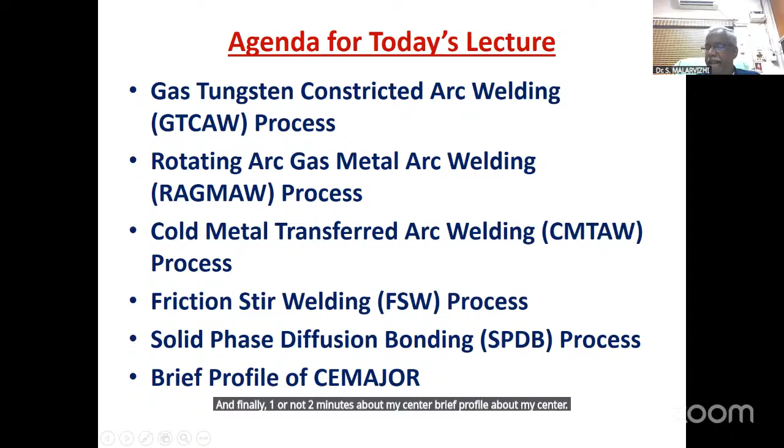The agenda for today's lecture is to cover five processes that are relatively new. I cannot say very new, but relatively new compared to other processes. One is gas tungsten constricted arc welding, GTCAW, also known as interpulse TIG welding. The other is MIG welding - rotating arc gas metal arc welding, another variant of the gas metal arc welding process. Third is CMT, cold metal transfer arc welding, which many people talk about. Then a lot of work has been done here at Annamalai University on friction stir welding, FSW. Finally, I'll give some glimpses of the solid phase diffusion bonding process, and 1 or 2 minutes about my center - a brief profile. This is my agenda for today's lecture. So the first process is gas tungsten constricted arc welding.

It's a relatively new process in TIG welding. You all know that TIG welding is a high quality, clean process, and though it is good for thin sheet welding, it is not suitable for thick sheets or thick plates. It's a non-consumable arc welding process. This is the diagram you all know - you have a tungsten electrode through which current passes, and an arc is established between the electrode and the workpiece. Then you need to supply the filler rod in the arc column to melt it. If the thickness of the sheet is less than 3 mm, that's the rule, you don't need to use the filler rod. If the thickness is greater than 3 mm, then filler rod addition is required.

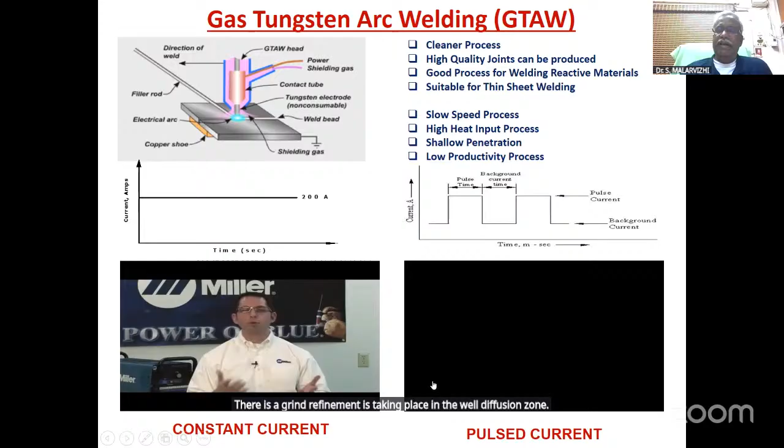In conventional TIG welding, as I told earlier, the arc is a bell-shaped arc, so it covers a larger area. It heats a larger area, and the heat supplied by the arc is distributed over that larger area. When it is distributed over a larger area, you heat a larger area, and the net result is shallow penetration.

But if you are able to constrict the arc by some means, then the arc can be narrowed down and becomes a stiff arc. Once it becomes a narrow arc, the area under the arc is greatly reduced, and you get deeper penetration in this process. Especially in fusion welding, the process which produces a very narrow weld zone or fusion zone is preferable.

Also, if you reduce the fusion zone size or weld zone size, the heat-affected zone size will also be reduced. So in this process, gas tungsten constricted arc welding, also known as interpulse TIG welding, they use superposition of a high frequency waveform on the main current. So you have main current, that's the maximum peak current, and the base current, similar to pulse current welding.

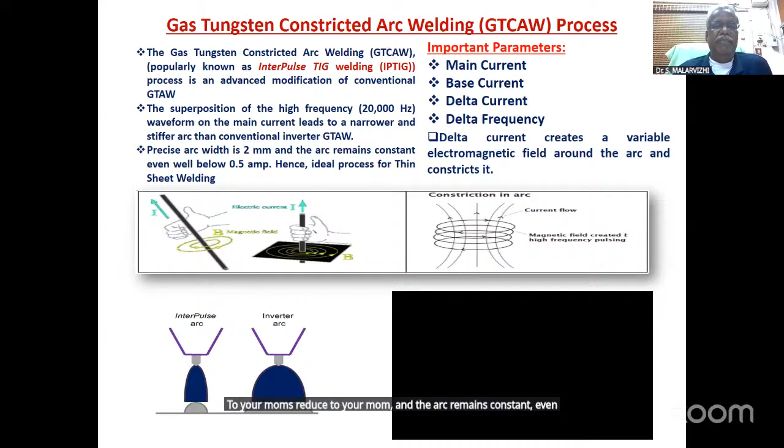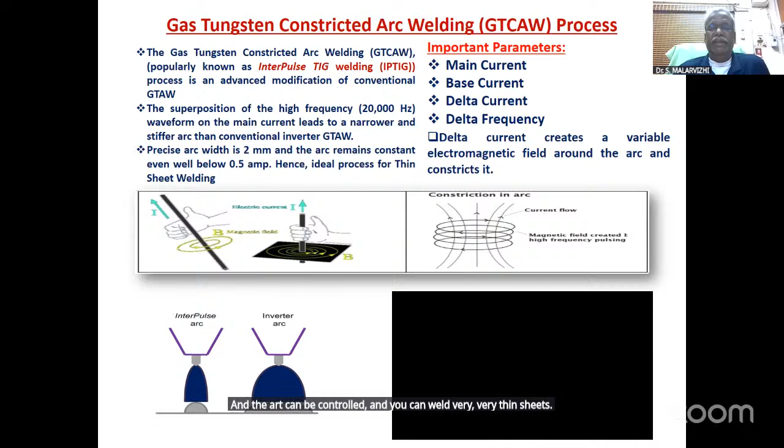By doing that, the arc width is reduced to 2 mm, and the arc remains constant even well below 0.5 ampere. That is the advantage of this process. Even at low current, the arc can be controlled, and you can weld very, very thin sheets with minimum heat input. That is the advantage of this process.

There are different modes available in this process. If you want to weld, you go for the high penetration mode. In this mode, the interpulse current, which is the superimposed delta current, is lower than the main current. If you use this condition, you will get deeper penetration.

But if the delta current, the interpulse current, is greater than the main current, then you can go for surface modification like cladding, hard facing, and also structure buildup. They use this mode for that purpose. Both modes are available in the process.

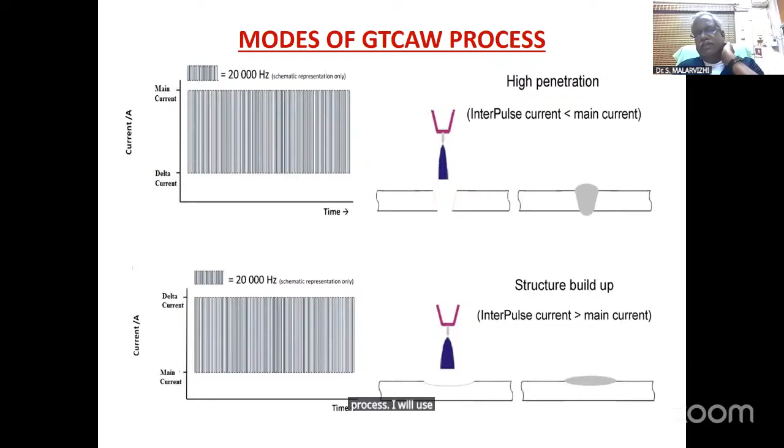We use this process for welding Inconel alloy, because Inconel is a nickel-based, high temperature alloy. In most aero engine components and gas turbines, nearly 47% of the components are made up of nickel-based alloys, and 25% of components are made of titanium alloy.

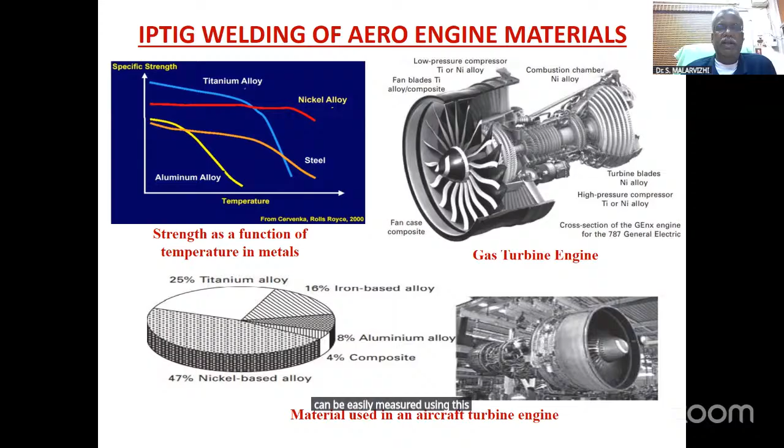So these two alloys can be easily welded using gas tungsten constricted arc welding. We have done a lot of work on tungsten, titanium alloy, and nickel-based alloy. Here I present just one case study which we did on the Inconel 718 alloy. This work was done for ISRO, VSSC Trivandrum, in collaboration with them. So this is about where the Inconel 718 alloy is used.

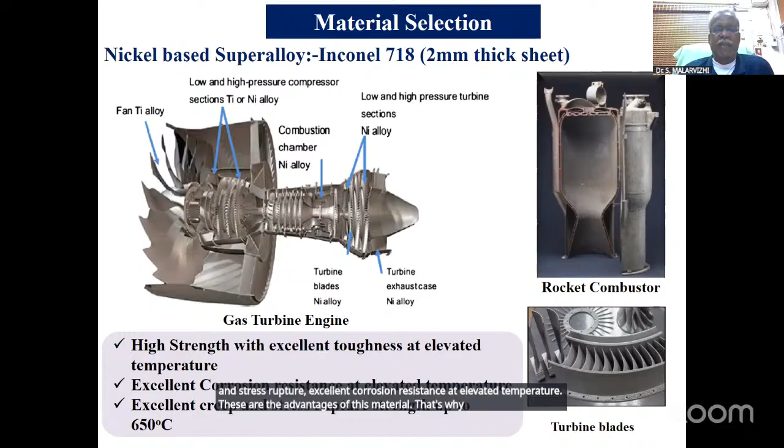High strength with excellent toughness at elevated temperature, excellent creep and stress rupture, excellent corrosion resistance at elevated temperature - these are the advantages of this material. That's why they are using it in aero engine gas turbine components. Here, generally, they are using gas tungsten arc welding, the conventional arc welding process to join these Inconel alloys.

When you use these alloys, because of the high heat input and lower arc penetration, which I explained earlier, that leads to porosity formation, distortion, and hot cracking related problems. It also leads to niobium segregation - niobium being one of the major alloying elements - and it forms in the fusion zone, drastically reducing the joint efficiency and leading to premature failure.

So this is the coarse dendritic structure that forms in the welded fusion zone, and here it is a coarse and interconnected Laves phase - that's an intermetallic phase. It's a brittle phase which forms in the fusion zone during welding using conventional TIG welding, GTAW, because of the high heat input and lower arc penetration.

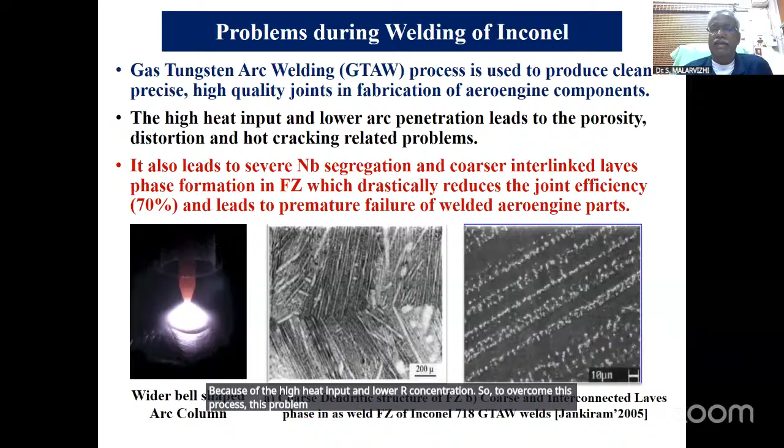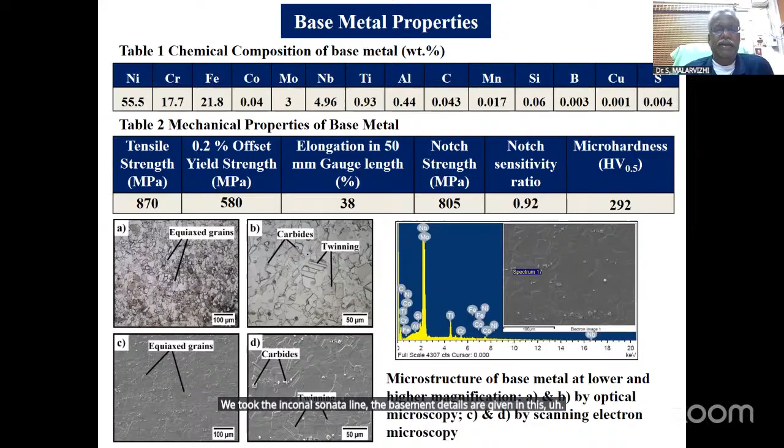So to overcome this problem, we utilized interpulse TIG welding, constricted arc welding. We took the Inconel 718 alloy, and the base metal details are given in this slide. After welding, the joints were compared with the base metal. The base metal tensile strength is 870 megapascal, and the welded joint after welding yielded 863 megapascal - that is nearly 99% joint efficiency.

But failure occurs again in the fusion zone because the fusion zone hardness is a little bit lower. If you see, the fusion zone hardness is 284 and base metal is 292; at the interface between the fusion zone and the heat affected zone, the failure has occurred. Also the notch strength ratio is less than 1, indicating that both the base metal and the welded joint are notch brittle materials - when you introduce a notch, it will behave like a brittle material.

So then we went for microstructure analysis, and elemental analysis was done. If you see the niobium phase, which is responsible for the formation of the Laves phase in this alloy, the base metal has 7.65% niobium. But exactly on the Laves phase, if you measure the composition, it has 10.05% niobium - an increase of nearly 2.5%. In the dendritic core, the niobium content is 5.57%. So the question was how to minimize the formation of niobium in the Laves phase.

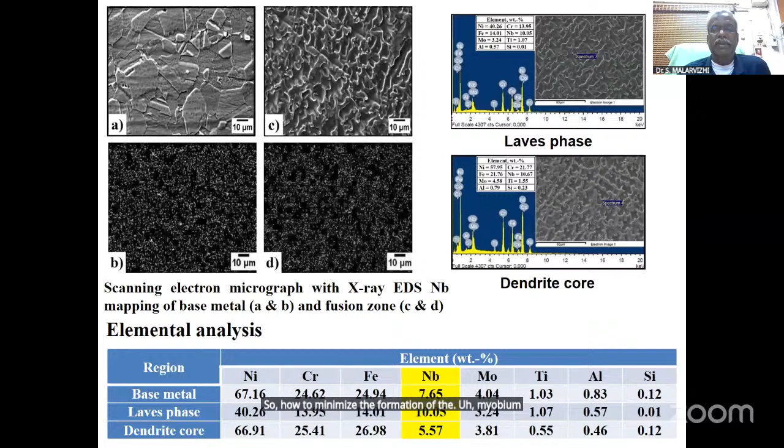So then we optimized the parameters using response surface methodology, and we found results. If you see this table of tensile properties of the joint - forget about the top one - if you use GTAW, the conventional TIG welding process, the joint efficiency obtained is only 71%. If you use gas tungsten constricted arc welding on the same material in the as-welded condition, it gives 99.2%, almost matching the base material strength.

And for EB welding, electron beam welding, the literature reports that you can achieve only 91.66%, and laser beam welding also only achieves 96%. So this process is much better than the GTAW process, and it is proven to be an alternate process to EB welding and laser beam welding.

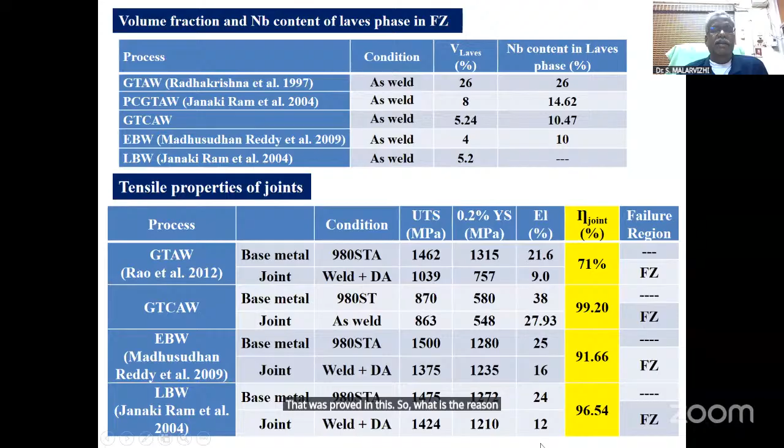So the reason for the superior tensile properties is attributed to grain refinement, because there is a pulsating action, and lower Laves phase formation, since the Laves phase formation is disrupted by the fluctuating action of the arc, with refinement observed in the fusion zone. The joint efficiency is 20 to 30% higher compared to the conventional TIG welding process. So this process is now used for joining titanium alloys as well as Inconel alloys, and is used for the repair and refurbishment of aero engine components.

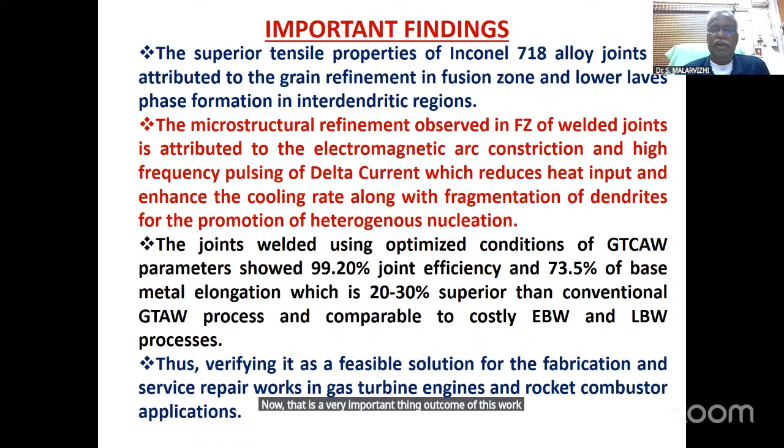That is a very important outcome of this work, and this can be applied for the repair and refurbishment of aero engine components.

I want to focus on another advanced process in GMAW, known as the rotating arc welding technique. Here the electrode rotates in a circular motion. In GMAW, the wire is fed in the forward direction, but here the filler wire is rotated. Let's see the clipping.

So here you can use no edge preparation.

The molten droplets are propelled from wire to base metal in a circular pattern, producing a centrifugal force which acts on the molten pool, minimizes the heat input, improves sidewall fusion, and produces minimum heat affected zone width. These are the advantages of this process.

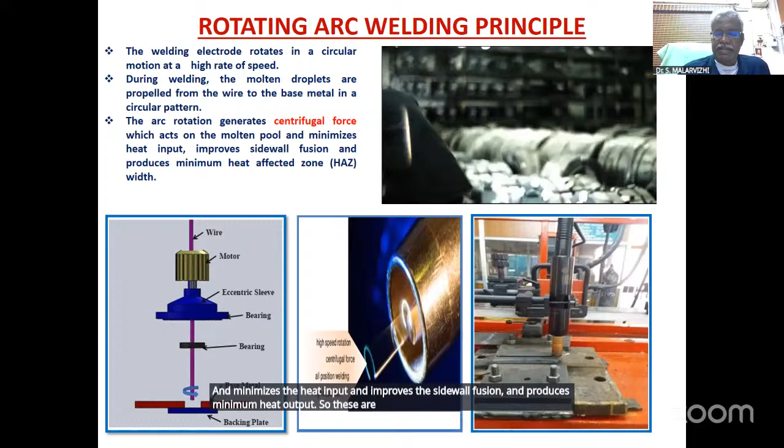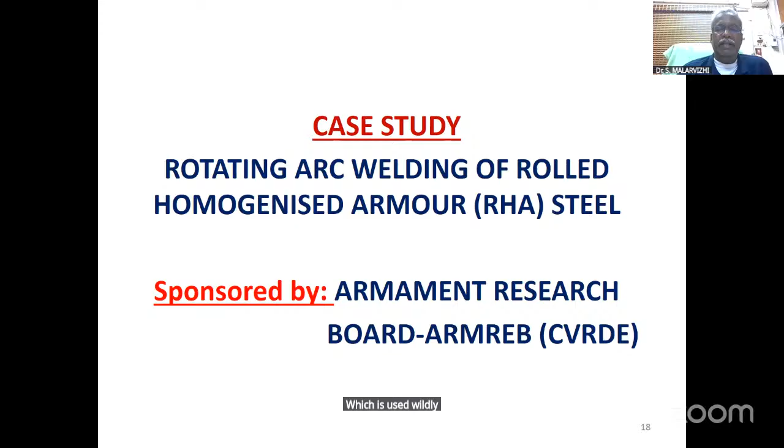We have this facility in our center, and the work was done on RHA steel, rolled homogeneous armor steel, which is used widely in the construction of battle tanks. This work is supported by CVRDE, Combat Vehicle Research and Development Establishment. For welding the armor steel, we use this process.

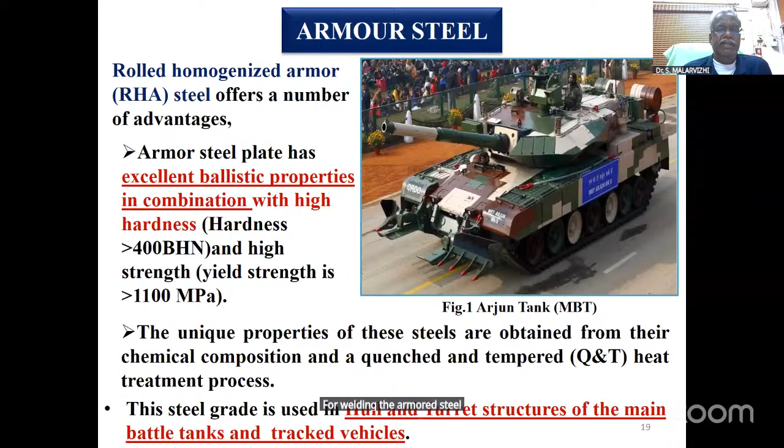With thick plates, one problem during welding is the joint design - we have to go for a single V groove or double V groove. Position welding is impossible to weld out of position in spray transfer mode. In many cases, when you go for multi-pass welding, improper sidewall fusion is one problem, and especially in RHA steel, heat affected zone softening is another problem.

Normally the heat affected zone has higher hardness, but here it gets softened due to the heat supplied by the process. Because heat affected zone softening occurs, it goes below the hardness level of the base metal. Then there is a possibility that if a projectile attacks exactly on the heat affected zone, it will pass through the base metal. These are the problems.

So here we took conventional MIG welding, GMAW process, referred to as SA - stationary arc, that's conventional GMAW. RA is rotating arc GMAW, the new process we are discussing.

For an 18 mm thickness plate, the stationary arc process used 6 passes to complete full penetration joint fabrication. But in the RA rotating arc process, we need only 3 passes, because there is no edge preparation - it's a square butt joint configuration as welded here. That's why the number of passes is reduced.

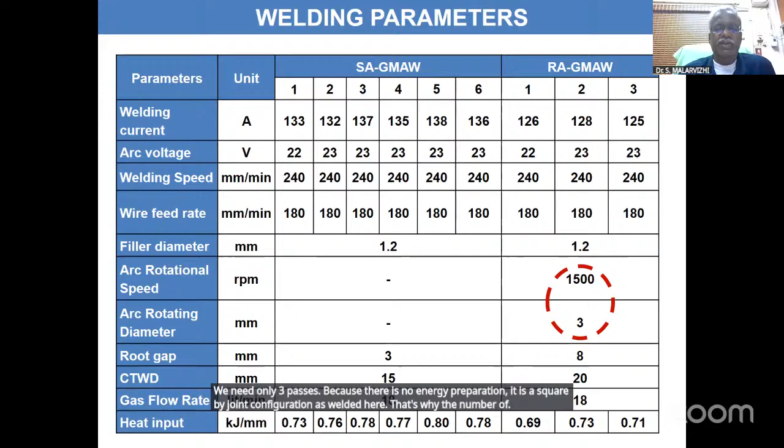If you see the macro structure of these two joints, the weld metal area for stationary conventional GMAW is 205 mm square, but in rotating arc it is 90 mm square, because only 3 passes are involved. Similarly, heat affected zone area reduces from 68.7 mm square to 22.6 mm square - it reduces by 1/3.

The number of passes came down from 6 to 3, mainly because of cumulative heat input - 6 passes leads to 4.6 kilojoules per mm, while 3 passes requires only 2.13 kilojoules per mm. So total cumulative heat supplied to the material is greatly reduced in this process.

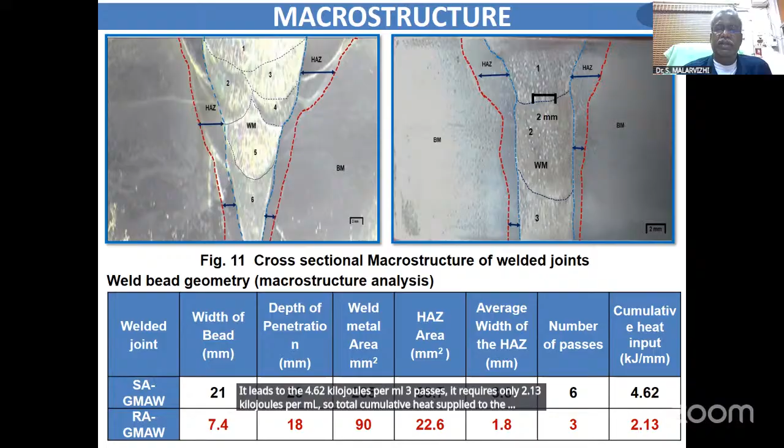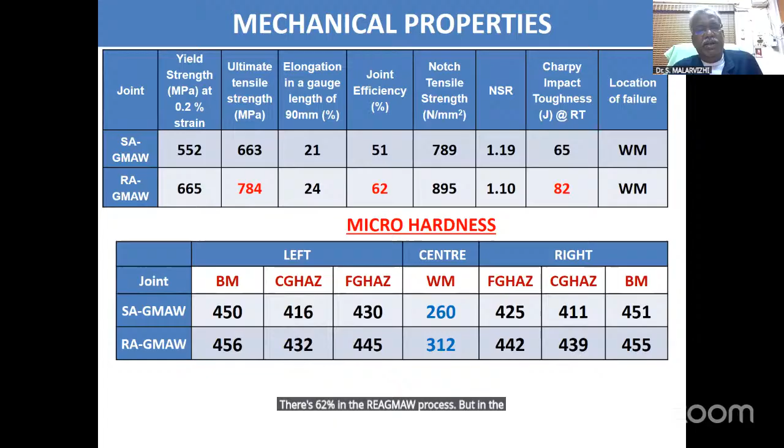That reflects in the mechanical properties also - joint efficiency is 62% in RA-GMAW process, but in conventional GMAW it is only 51%. Why is the joint efficiency low? Here we used only austenitic stainless steel filler.

Though the base metal is ferritic high strength steel with 1000 to 1100 megapascal tensile strength, due to hydrogen induced cracking concerns, CVRDE suggested using only austenitic stainless steel filler to avoid hydrogen induced cracking during service. With austenitic stainless steel filler, the joint efficiency will be around 50% only. By this method, joint efficiency is improved, increasing from 51% to about a 6-10% increase obtained here.

The weld metal hardness is 260 HV and 312 HV. But the base metal hardness is very high, at 450 HV.

That's why they are going for the austenitic stainless steel filler. There is a microstructure in both the processes composed of delta ferrite in the plain austenitic matrix. There is no much difference in the phase volume fraction of the delta ferrite, only 25 to 27%.

But the morphology of the delta ferrite is changed because of the stirring action of the rotating arc, or the centrifugal force acting on the weld pool. In the stationary GMAW, the delta ferrite is globular, but here in the rotating arc, it is vermicular, the delta ferrite as formed.

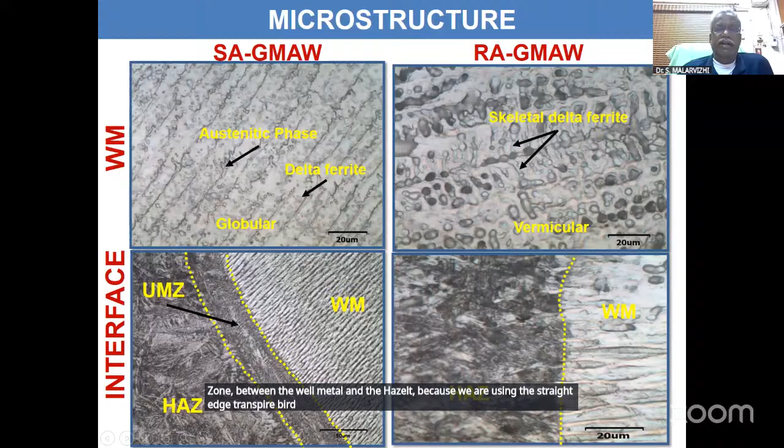This, of course, we can explain all the mechanical properties of the joints, weld metal, it's nothing but strength and hardness. The strength and hardness is influenced by the microstructure, the grain size, and the volume percentage of phases. These three - morphology, grain size, phases - all those things are influenced by the solidification pattern, solid state transformations, inclusions, and gas dissolution.

This solidification pattern is influenced by the cooling rate and heat input during the welding process. In the stationary arc process, heat input is higher, 4.62 kilojoules per mm. But the cumulative heat input in the rotating arc is only 2.13 kilojoules per mm. That is the reason the cooling is faster, and that affects the morphology of the delta ferrite, from the globular into the vermicular microstructure.

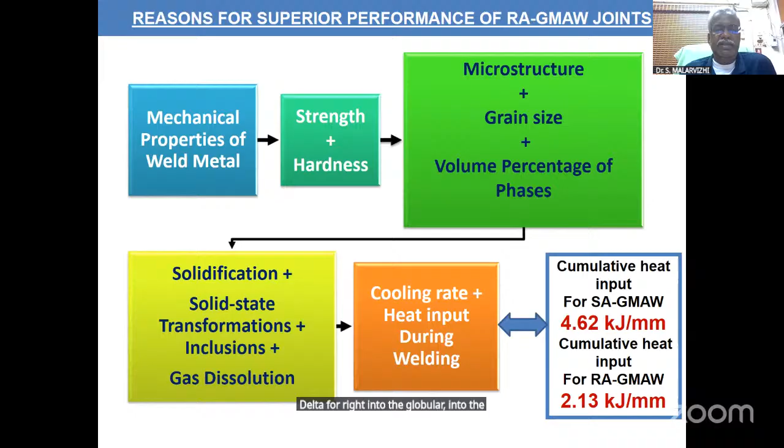Because of that, there is a 18% higher tensile strength obtained, and the heat affected zone width is minimized to 1.8 millimeter from 3.6, and the number of passes is also reduced from 6 passes to 3 passes.

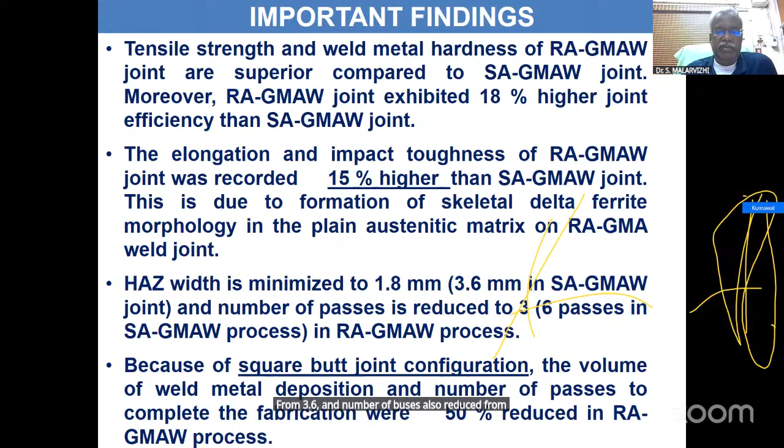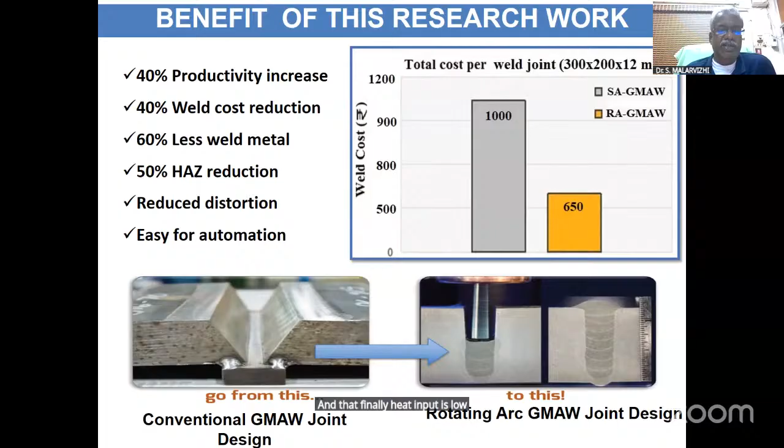So if you see the benefits of this process: in conventional GMAW, you have to use the single V or double V joint configuration, but in the rotating arc, you can go for the square butt joint configuration. So there is a 40% improvement in productivity and weld cost reduction, because only 3 passes are required, and the weld metal cost is reduced, and less weld metal is utilized. The heat affected zone width is also reduced, and finally, since heat input is low, the distortion is also reduced. So these are the advantages of this process.

The third one is the CMT process. Of course, many of you have heard about this process, CMT, cold metal transfer arc welding technique. So briefly, I'll explain what is cold metal transfer arc welding. I don't want to go into detail.

The cold metal - it's not that the weld metal is cold. It's that low heat is supplied through the weld metal. So in the conventional process, this is also a variant, an advanced form of the GMAW, gas metal arc welding process.

In the conventional GMAW process, the filler wire is fed in one direction, the forward direction. The wire melts and is consumed, and it is continuously fed in the forward direction, meaning moving towards the weld pool. But in the CMT process, what they did was the wire feed is not only in the forward motion, it also moves in the backward motion.

Why did they do this? Again, as I told in the beginning, the phenomena involved in the metal transfer is - if you see here, the filler wire melts, the molten droplets form, and the molten droplets, once transferred...

So the molten droplets form, and between the molten droplets - during that time, there's no need to have high current. And the wire is retracted back again. So in the third stage, the wire goes back again, it was retracted. So here, they have two motors - one motor will move the wire in the forward direction, the other motor will pull back the wire in the backward direction.

If you see these clippings, you can understand - this first one is the CMT, you can see the push-pull action in the wire, but in the conventional GMAW on the right side, it is only in one direction. So when the filler rod approaches close to the weld pool, heat input will be higher. When the filler rod is retracted, the heat input is reduced.

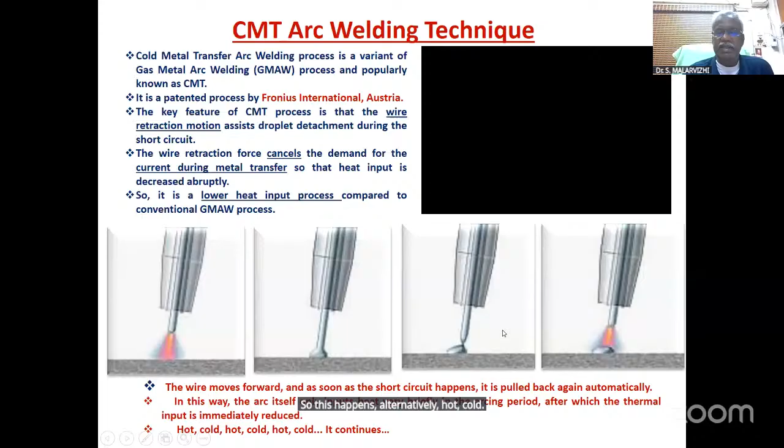So this happens alternatively, hot, cold, it is continuous. That's why it is called cold metal transfer. When compared to conventional MIG welding, the heat supplied in this process is greatly reduced. That is one advantage of this process.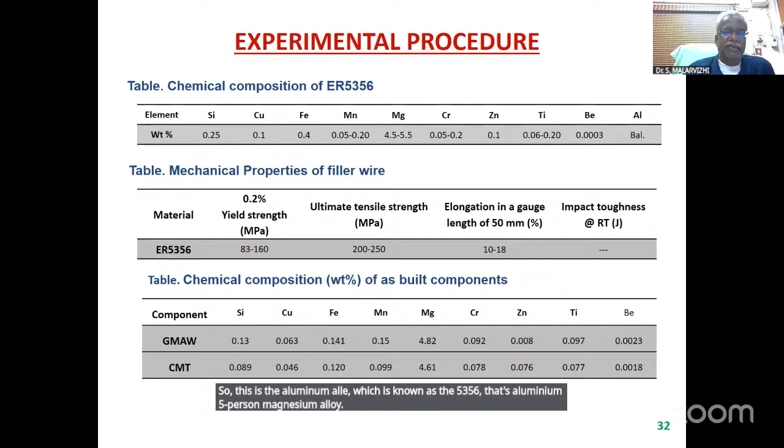So we use this process for wire arc additive manufacturing of aluminum cylindrical components. This is the aluminum alloy known as 5356, that's aluminum with 5% magnesium alloy. We took this as the filler wire, and used both processes, conventional MIG welding and CMT process.

These are the heat inputs, and we have a facility to carry out the wire arc additive manufacturing. Using this facility, we made cylinders of 150 mm height and 150 mm diameter, with wall thickness of 4 mm. This 150 mm height wall requires nearly 60 to 70 passes of deposition, one layer after the other.

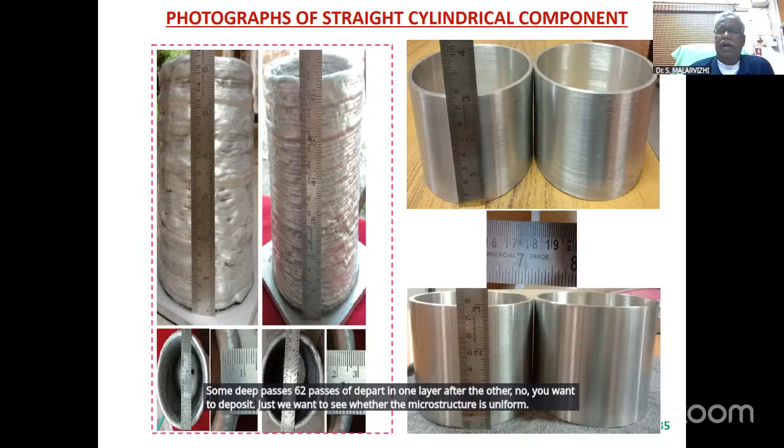We wanted to see whether the microstructure is uniform from bottom to top. That's why, after fabrication, we made this analysis.

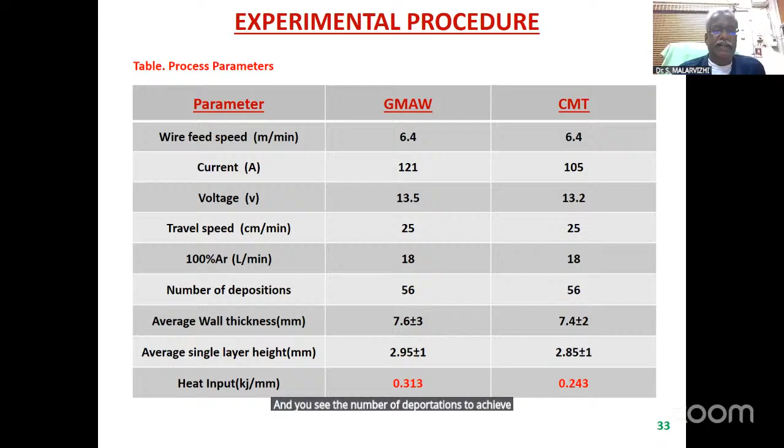Yeah, we used two processes, one is GMAW and the other is CMT, for comparison purpose. And if you see the number of depositions to achieve 150 mm height, it is 56 passes in GMAW and 56 passes in CMT process.

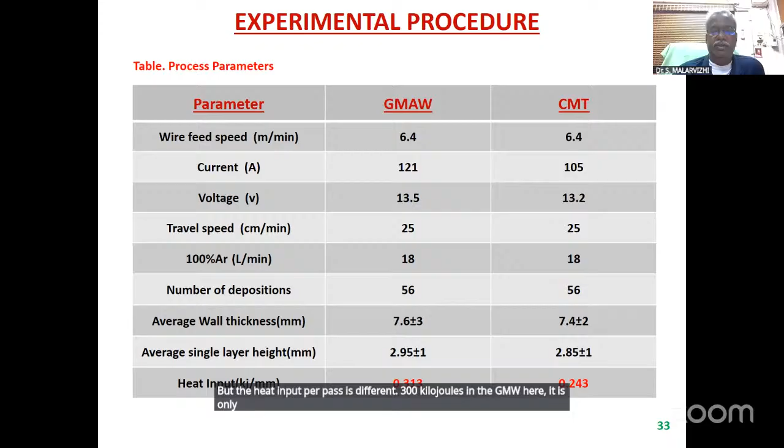The number of passes remains the same, but the heat input per pass is different: 300 joules per mm in GMAW, here it is only 240 joules per mm, 240 joules per mm.

And this is the facility we used, and these are the cylinders we made. Here, we divided it into two portions: one is from 0 to 75 mm, which is the bottom portion, and from 75 mm to 150 mm, we made the top portion. If you see here, there is not much difference between the bottom and top portion.

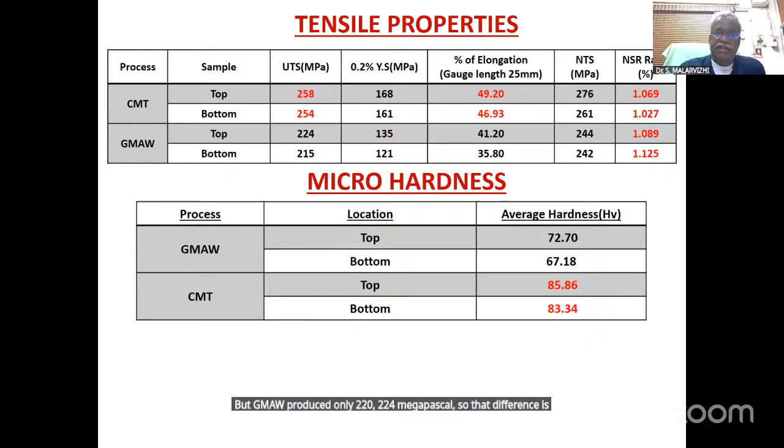The tensile strength - but if you see between CMT and GMAW, there is an appreciable variation in tensile strength. CMT has produced nearly around 250 megapascal tensile strength, but GMAW produced only 220 to 224 megapascal. That difference is also reflected in the hardness values. In GMAW it is 70 to 72 average, and here it is 85. So 15 HV higher hardness is achieved in the CMT process.

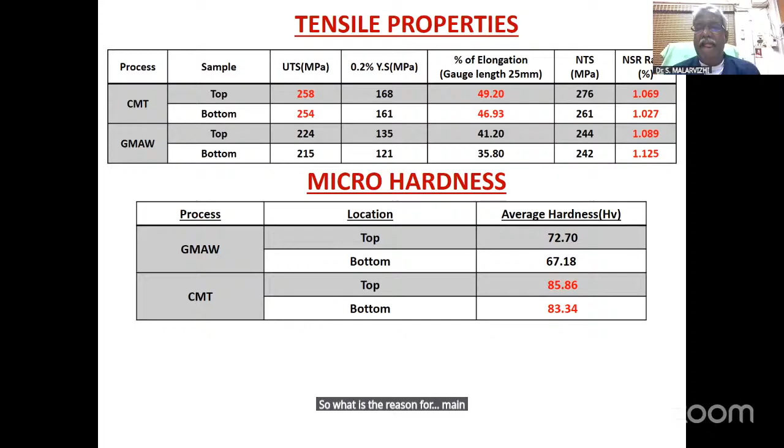So what is the main reason for increase in the hardness as well as the strength? Then we went for the microstructural analysis. The grains are finer - in CMT, a finer grain size is formed compared to GMAW, because of the push-pull action of the filler wire.

That means the push-pull action of the arc - the arc is going forward and backward. When you do this push-pull action, there is a fluctuation in the heat input also. When the arc is moving towards the weld pool, more heat is supplied. When retracting the arc backward, heat supplied to the metal is reduced, so there is fluctuation in the heat input. In conventional GMAW, there is no push-pull action, only forward motion, so the heat input remains constant. Apart from that, this action produces fine grains.

Apart from that, the pores - in aluminum alloy, porosity is one of the culprits and one of the forms. If you see, the number of pores is greatly minimized in CMT compared to the GMAW process. The percentage of porosity in CMT is less than 1%, but in GMAW it is a higher percentage. So the porosity is less, the material is more dense, more harder, and it increases the strength.

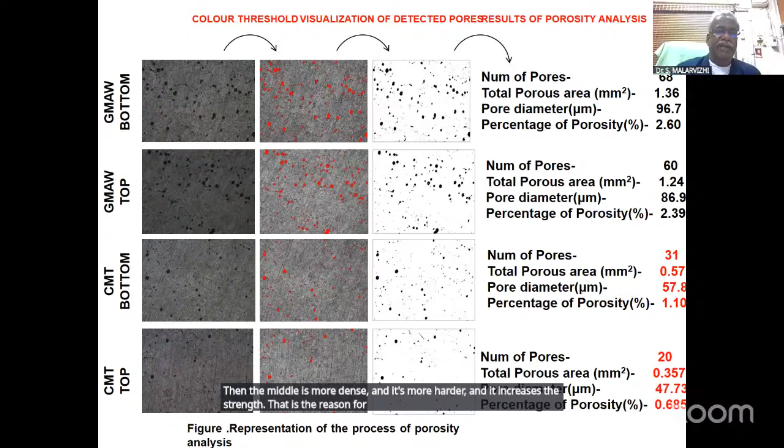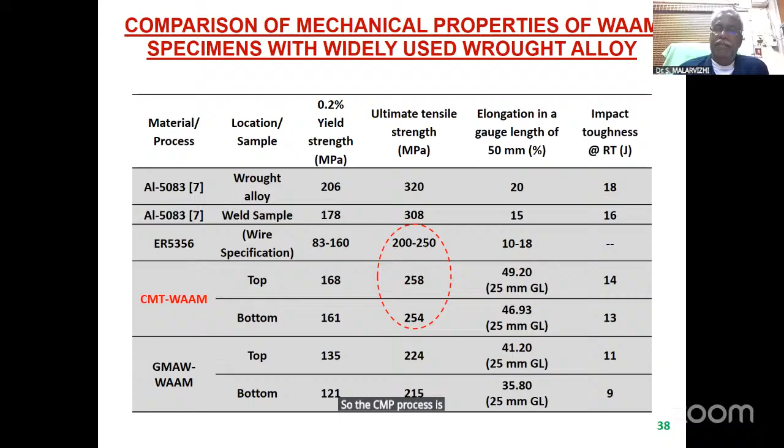That is the reason for it. We compared these values with the wrought alloy of aluminum, same grade, and it is almost matching with the wrought alloys also. So the CMT process is a preferable process for making wire arc additive components using wire arc additive manufacturing technique.

There are many processes available for wire arc additive manufacturing, like conventional GMAW process, and even people are using conventional TIG welding process. But this CMT process, because of the lower heat input involved, produces denser, harder, and stronger material than the other welding processes. So this is a beautiful process for making wire arc additive manufacturing components.

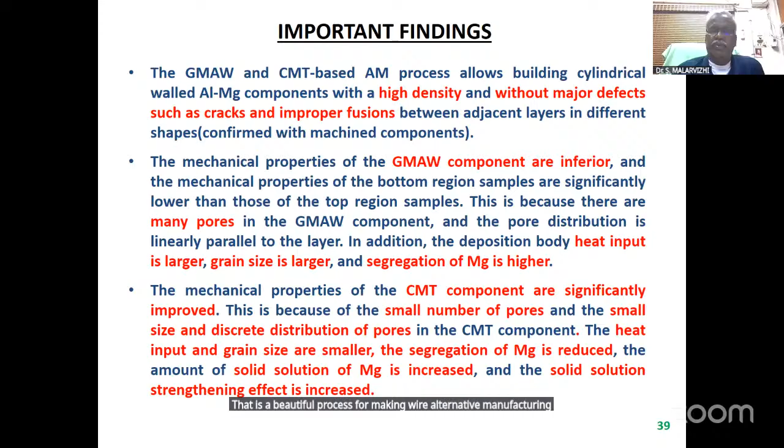And the fourth process is FSW, friction stir welding technique. I will quickly go through it. FSW, many people have heard, is a solid state welding process, and we are using a non-consumable electrode here.

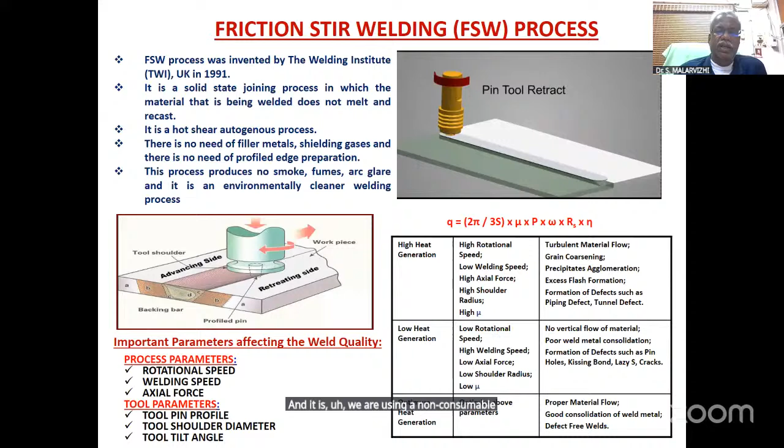The tool, not electrode, is used here. This process was initially invented by the Welding Institute, TWI, UK, in 1991, and it was a patented process till 2001. After 2001, many people started working on this process.

This process was basically developed to weld aluminum alloys, because aluminum alloys, especially high-strength aluminum alloys, are challenging to weld by MIG or TIG welding process due to hot cracking problems, porosity formation, alloy segregation, and partially melted zone. These are the problems that normally occur in the fusion welding of high-strength aluminum alloys. So this process is basically developed for welding aluminum alloy.

For welding aluminum alloy, you can use high-speed steel as the tool. The tool is the heart of the process. The tool has three portions: the top portion is the shank portion, which fits into the machine; below that is the shoulder region; and below the shoulder there is a pin region, shown as dotted in the diagram.

So the design of the tool is very important. You cannot use one tool for all plate thicknesses. Based on the plate thickness, you have to make the tools. For example, if you want to weld a 6 millimeter thick aluminum sheet, you have to make a specific tool for it. Normally the pin diameter is equal to the plate thickness, and the shoulder diameter is normally 2.5 to 3 times the pin diameter.

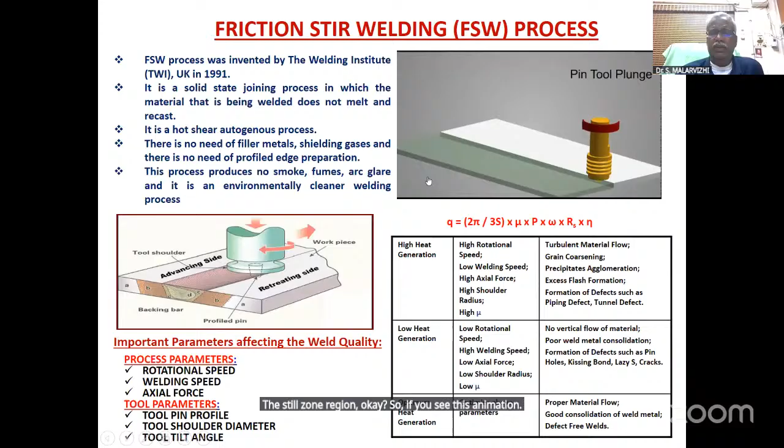The D region in this diagram is known as the stir zone, or the dynamically recrystallized zone. Dynamic recrystallization takes place during the welding process, producing very fine grains in the stir zone region. If you see this animation, the tool rotates at a rotational speed, plasticizes the material, stirs it, and once that is established, you can move the tool in the forward direction.

Here also, a lot of parameters have to be optimized: tool rotational speed, welding speed, axial force acting through the tool, tool pin profile, tool shoulder diameter, and tool tilt angle. You have to optimize these parameters to get the optimum quality of weld, because if you don't, problems will occur.

High heat generation will lead to defects like turbulent material flow, grain coarsening, excess flash formation, and piping or tunnel defects. If the heat generation is very low, the material will not flow properly, leading to problems like pinholes, kissing bonds, and cracks. So one needs to optimize the process parameters to get a defect-free weld.

But as of today, for aluminum alloys and magnesium alloys, the FSW process is well established.

Optimized parameters are available for all grades of aluminum alloys and magnesium alloys. For other materials, people are working on it. Based on the success experienced with soft metals or low melting materials like aluminum, magnesium, and copper, researchers used this process to weld high melting temperature materials like steels, carbon steel, stainless steels, titanium alloys, and nickel-based alloys.

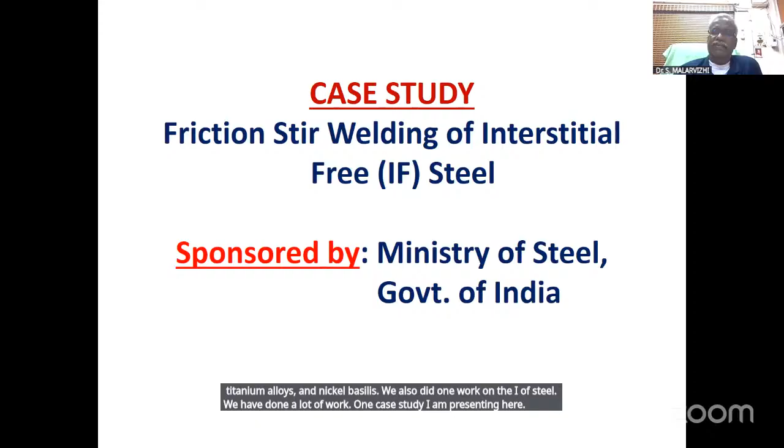We also did one work on IF steel. We have done a lot of work, but one case study I am presenting here. This IF steel is widely used in the automobile sector because of its high ductility. This is the microstructure - it's full of ferrite grains.

Why is it called interstitial free steel? Because carbon is almost 0.002. If it becomes zero, it is iron - we need to keep some carbon. So the interstitial element, one of them is carbon, and it is kept almost close to zero, 0.002.

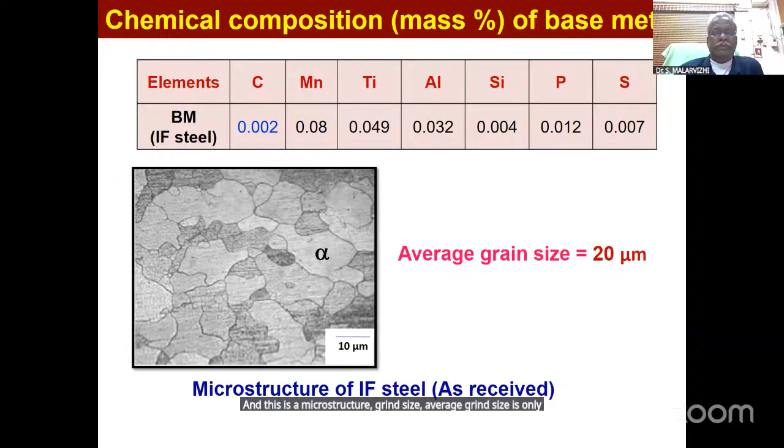And this is the microstructure - average grain size is only 20 microns. This steel was welded using the friction stir welding process. One of my students, Dr. Lakshminarayanan, did this work some time back.

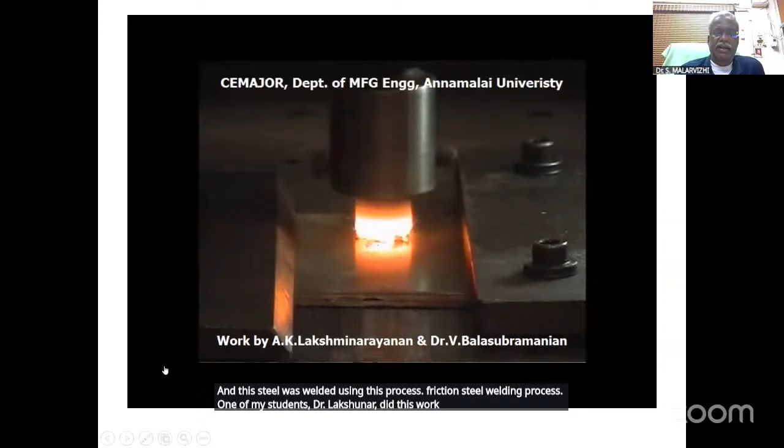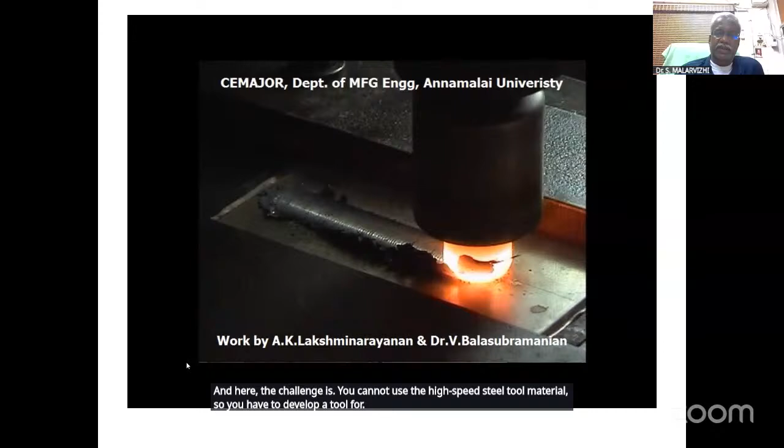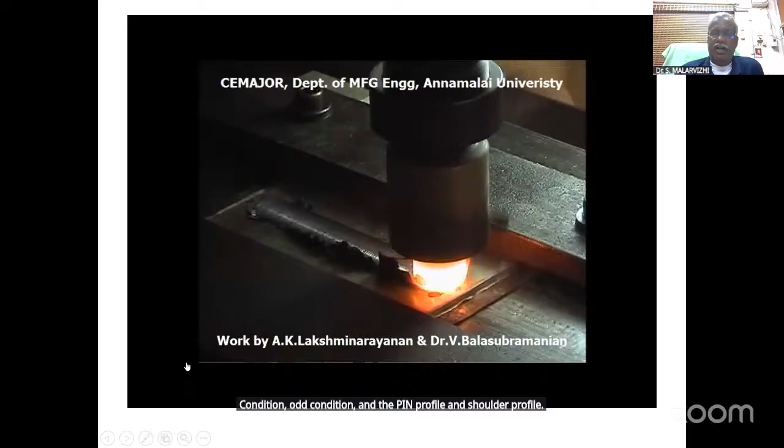Here the challenge is you cannot use high-speed steel tool material. You have to develop a tool that can withstand this hot condition - the pin profile and shoulder profile should not be lost, there should not be any tool wear. So you have to select materials which can withstand this temperature and also the forces at this temperature.

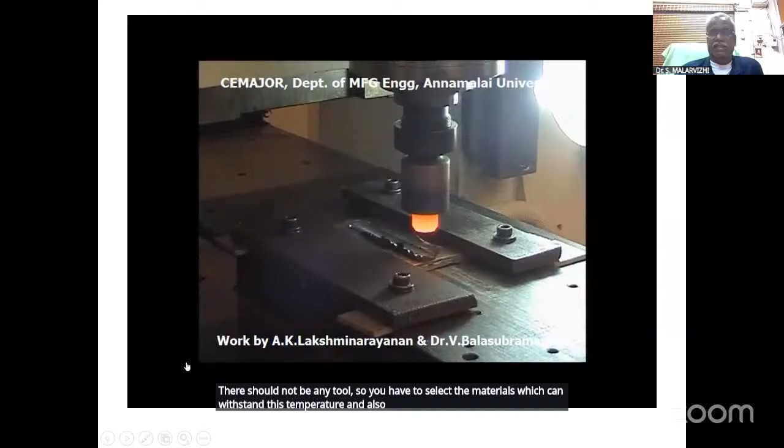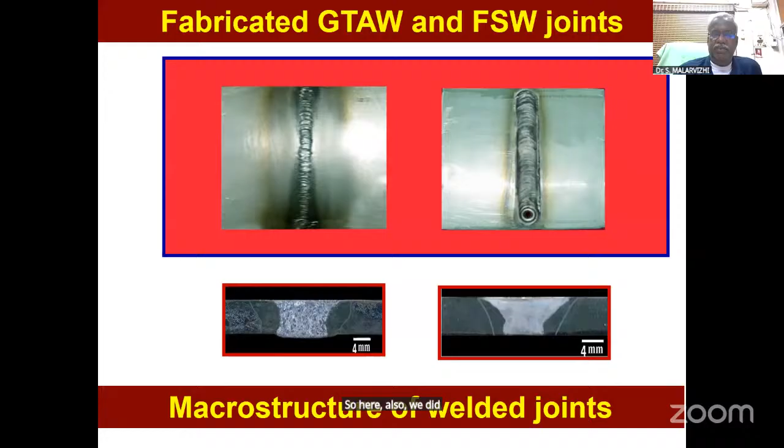Tungsten-based alloy is one option, molybdenum-based alloy is another option, and tungsten-rhenium alloy, PCBN is the best option for making tools for friction stir welding of high melting temperature materials. So here also we used FSW and GTAW TIG welding process for joining IF steel.

This slide is very important. The top one is the fusion zone - when you use the TIG welding process, the fusion zone microstructure is shown here, the average grain size is 80 microns. But the stir zone of the FSW, you see the grains become finer - the average grain size is 5 microns here.

When you use TIG welding, the grains grow because of the high heat input involved in the process. But in the stir zone, there is no melting at all, only plasticizing, and dynamic recrystallization takes place. Because of that, grains become finer and finer, and this is one viable method to produce near nano grain bulk materials.

We are also trying to produce near nano materials - nano means the grain size should be less than 100 nanometers, but we achieved only 500 nanometers. That's a near nano material that can be achieved by this process.

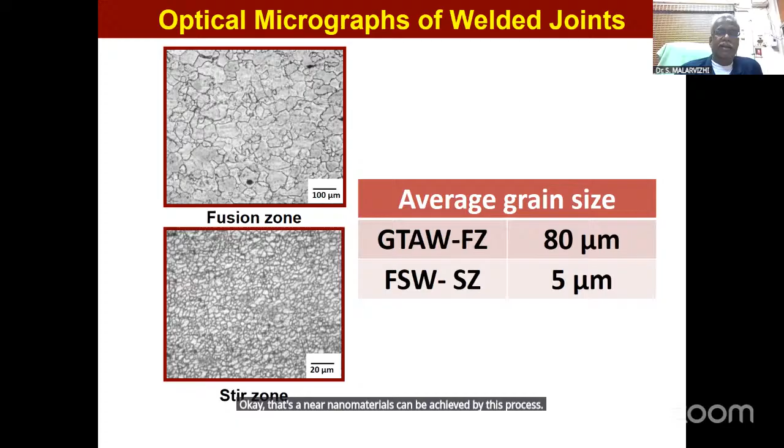For the heat affected zone microstructure, in TIG welding it is 105 microns average grain size because grain growth takes place, but the base metal microstructure is only 20 microns. In FSW, the heat affected zone is 20 microns. So because of the stirring action and less heat input, this process gives better performance.

For mechanical properties, the base metal tensile strength is 282 megapascal, but TIG welded joints yielded only 208 megapascal, while friction stir joints yielded 274 megapascal - just a few 10 megapascal lower than the base metal strength. That means joint efficiency is 74% in TIG welding, but 97% we achieved in FSW.

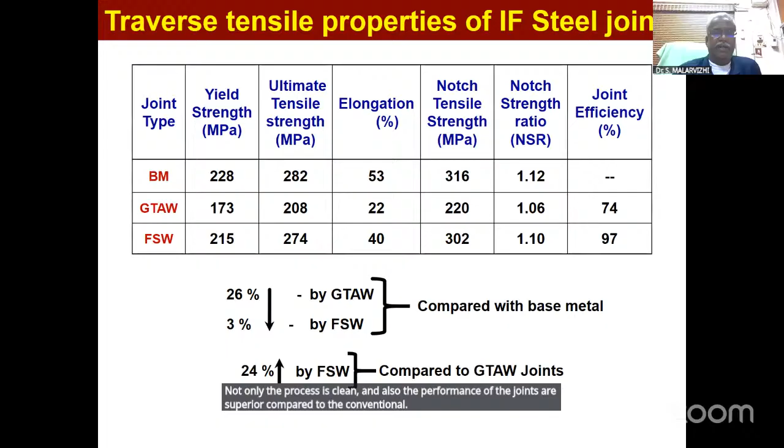In TIG welding, the problem is we have to use filler wire, shielding gas, and edge preparation. But here there is no shielding gas, no need of filler wire, no edge preparation, and this process has no smoke, no fumes, no radiation - nothing. That's why this process is known as the green welding process or clean welding process. Not only is the process clean, but the performance of the joints is also superior compared to conventional welding processes. This FSW process has enormous potential to use in different conditions.

It is a very good process for joining similar and dissimilar materials. Friction stir processing to refine the grains is an ideal process. Friction stir spot welding - now many auto industries are replacing rivet and thread joints with friction stir spot welding. Friction surfacing is another area, and surface composites can also be developed.

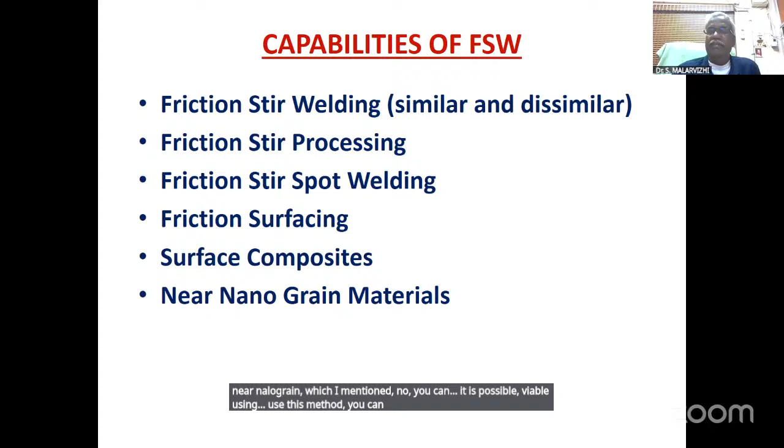Near nano grain materials can be produced using this method, which is viable. The last process today is solid phase diffusion bonding, which is also a solid state welding process, but it is slow.

There are different stages here. Initially, contact is established because whatever polishing you do, there are asperities on the surface, so peaks will contact each other, and valleys create gaps in between.

This process involves applying pressure and temperature, with sufficient time given. Bonding pressure should be high enough to ensure good contact between the two joining surfaces, but should not exceed the yield strength, because if it does, the material gets deformed, affecting shape and dimensions.

Bonding temperature should be 50 to 70% of the melting point. You should not go too high, because that leads to recrystallization and other problems. It should stay below the recrystallization temperature.

Holding time must be sufficient since it's a slow process, requiring a minimum of 30 minutes and a maximum of 2 hours to get good quality bonding. Surface roughness is also very important; surfaces must be prepared and finished to a roughness of 0.4 microns.

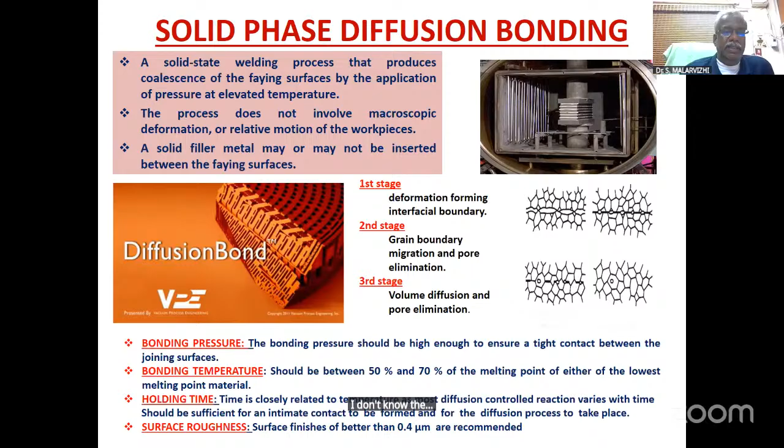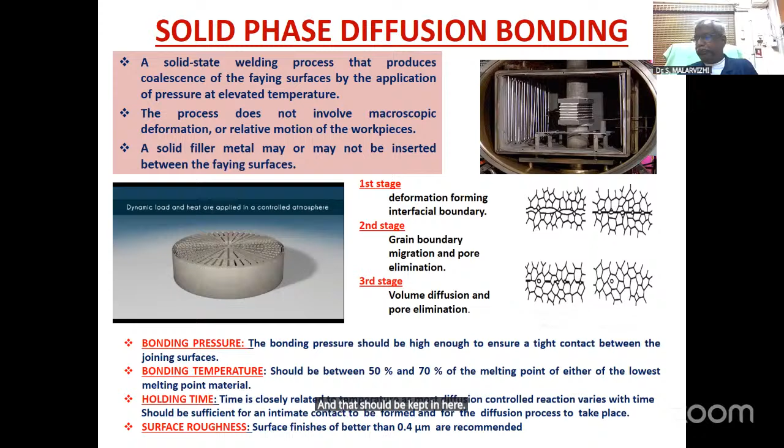The plates to be bonded should be stacked one over the other and kept in a vacuum furnace with a fixed temperature. As the furnace temperature rises, the bonding slowly takes place, and the grains grow and combine together. If bonding similar materials, you will not find any interface between them.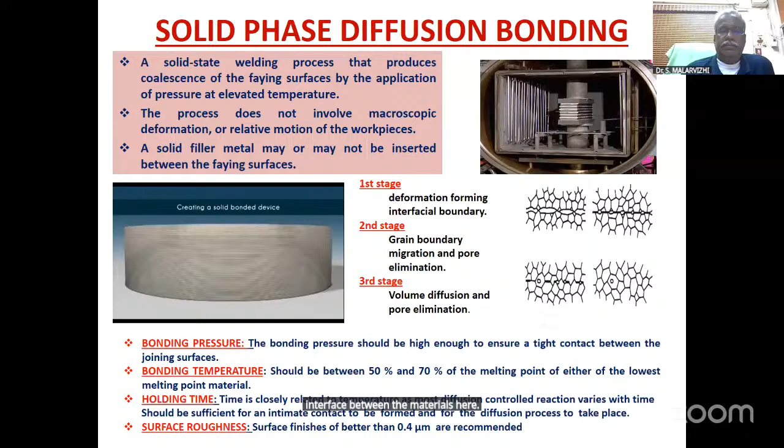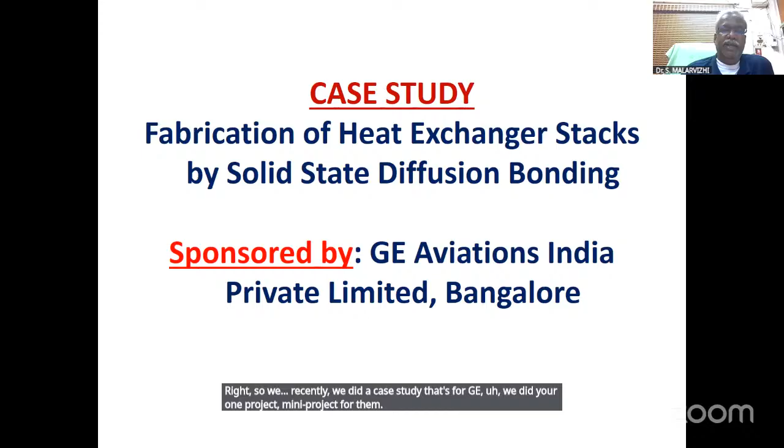We recently did a case study for GE, a mini project on fabrication of heat exchanger stacks. This is a compact heat exchanger, not a power plant heat exchanger, but one used in the electronics industry for small devices and components. There are three types of heat exchangers: printed circuit heat exchangers, formed plate heat exchangers, and hybrid heat exchangers.

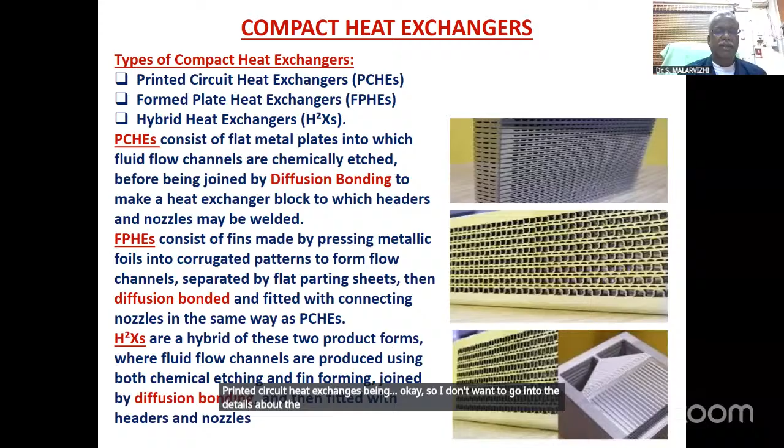In this case study, we tried to make printed circuit heat exchangers, so I won't go into details about the other types. We used Inconel 625 thin sheets with a thickness of 2.5 millimeters, making sheets of 50mm by 50mm.

In the sheet, for fluid flow, we produced keyways using the grinding process, then polished them, and stacked them one over the other. Ten plates of 2.5mm each were stacked together. After arrangement, you get channels through which the coolant fluid will flow.

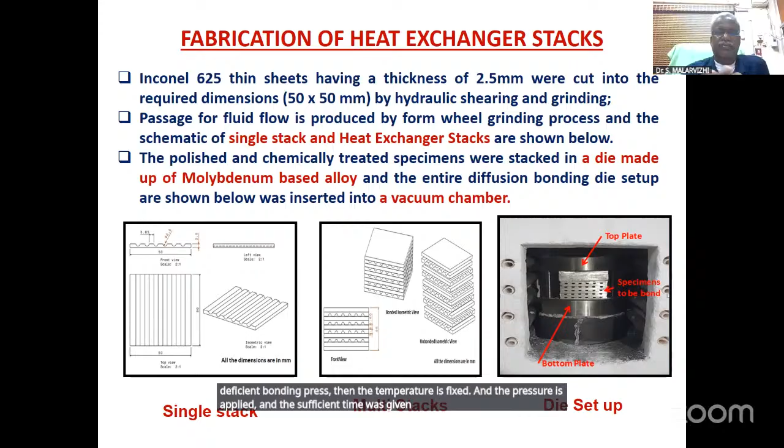Whatever heat is generated on top, the coolant absorbs it, so one end is cool and the other is hot. This is used in the electronics industry. All these stacks of 10 sheets were placed in the vacuum furnace diffusion bonding press, with fixed temperature and applied pressure over sufficient time. This is the high temperature diffusion bonding facility we have in our center, used to make the heat exchanger stacks.

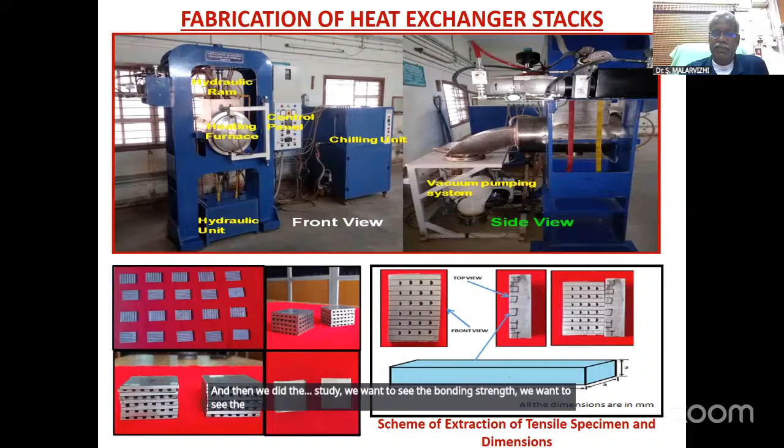Then we studied the bonding strength and microstructural features, slicing the specimen to examine these characteristics. It wasn't easy, because first we had to identify the feasible temperature range: below 900 degrees centigrade, no bonding occurred, and above 1150 degrees centigrade, the stacks bonded with the die top plate, which is a problem.

So between 900 and 1150 degrees, we achieved quality bonding. Similarly for pressure, below 30 bar no bonding occurred, and above 70 bar the stacks again bonded with the die plate due to deformation. For holding time, less than 100 minutes gave no bonding, while more than 140 minutes caused bonding with the die plate. So within these ranges of temperature, pressure, and holding time, we needed to optimize the process.

We used statistical tools and constructed a diagram - essentially a processing map - plotting temperature versus holding time, and temperature versus pressure versus holding time. Within that window, the blue color window, if you select any parameters of temperature, pressure, and holding time, you will get bonding.

But if you select parameters outside the window, bonding will not occur. So this kind of diagram is helpful to engineers - they don't need to do trials. By using this diagram as a reference map, they can select the optimum parameter within this domain, this processing map, to get maximum strength. We used RSM again and found that.

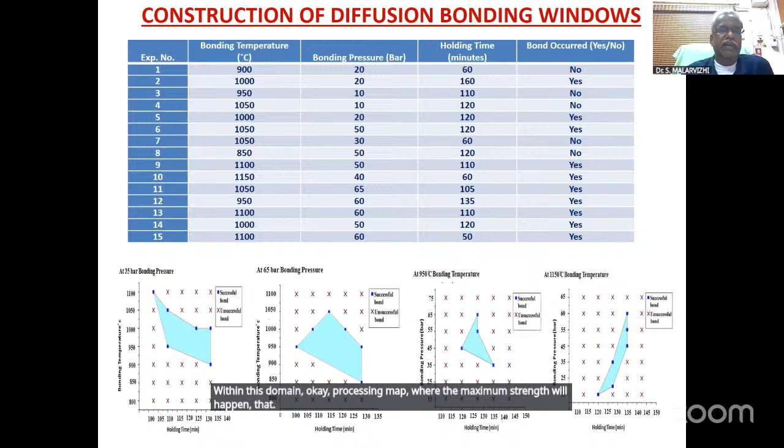So what is the effect of temperature? If you see these 4 different microstructures at 4 different temperatures we used, at 950 there's a clear gap between the top and bottom plate. In the last one, at 1100 degrees centigrade, there is no gap - it's completely closed in the diffusion bonding. So temperature has an effect, and we have to choose the right temperature.

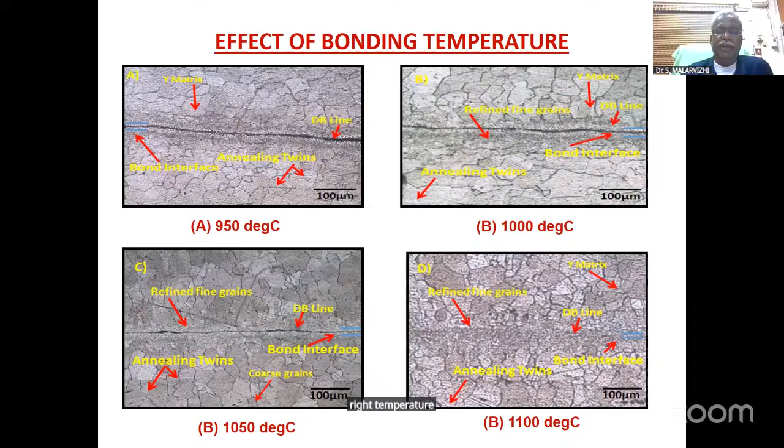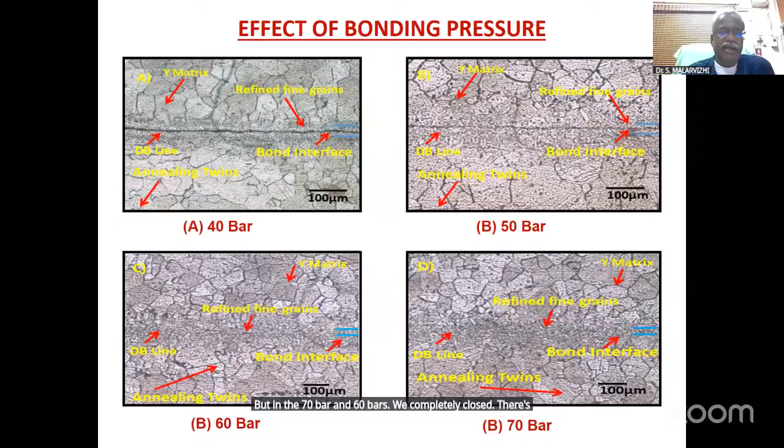Similarly, pressure also has an effect. At low pressure, 40 bar, you see there's still a gap, an air gap between the top plate and bottom plate. But at 70 bar and 60 bar, it's completely closed - perfect bonding has occurred. So we optimized the parameters using RSM and also compared with the experimental results.

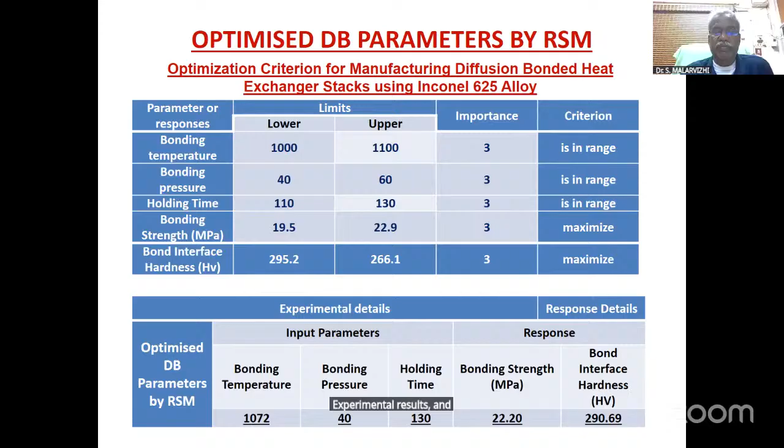We are able to make compact heat exchangers using this diffusion bonding method, and the work is going on. We are trying different profiles and different configurations of compact exchangers. This is the ideal process, not only for similar materials but for dissimilar materials also.

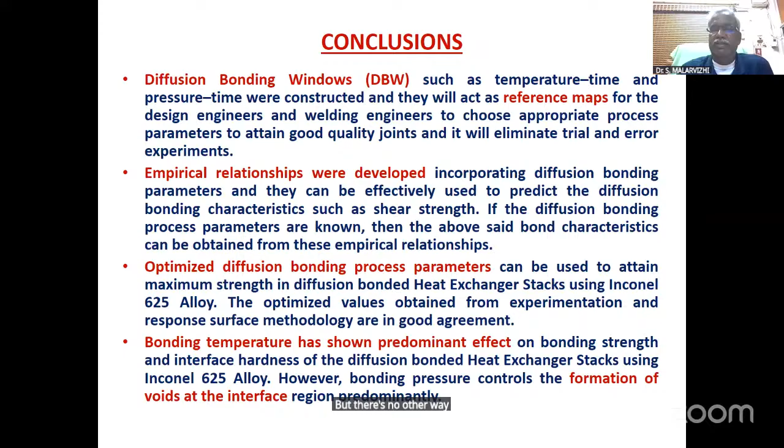The only problem is the vacuum furnace size will limit the component size, and it's a slow process. Minimum you require 6 hours - 1 hour for heating, 1 hour for cooling, and maintaining the temperature for 2 hours. So to produce one product, it requires 6 hours. But there's no other way - only a few components are to be made using only this process.

So with this, I'll come to the final phase of my presentation. This is a brief introduction about my center, since many of you are new to it. The center, CEMAJOR, was established in 2008. We have 10 labs in our center, and we are working on 3 different areas.

Materials joining is the major area. Then we have surface engineering, and the third one is advanced materials. So these are the 3 areas we are working on.

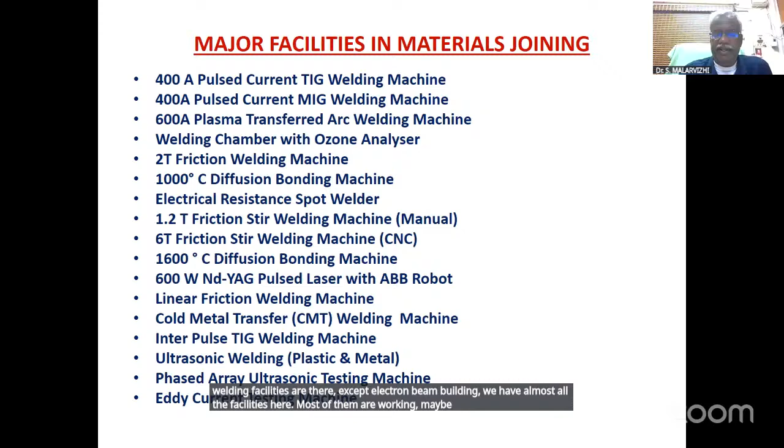For the materials joining field, we have these facilities - welding facilities are there. Except for electron beam welding, we have almost all the facilities here. Most of them are working, maybe 1 or 2 are under maintenance. This is the photograph of facilities available in materials joining and surface engineering.

That's another area we work in - thermal spray coating, and other coatings like corrosion resistance coating, wear resistance coating, thermal barrier coating, and oxidation resistance coating. We have a very good thermal spray lab, and tribology and corrosion labs with instruments to carry out testing. These are the photographs of facilities in surface engineering.

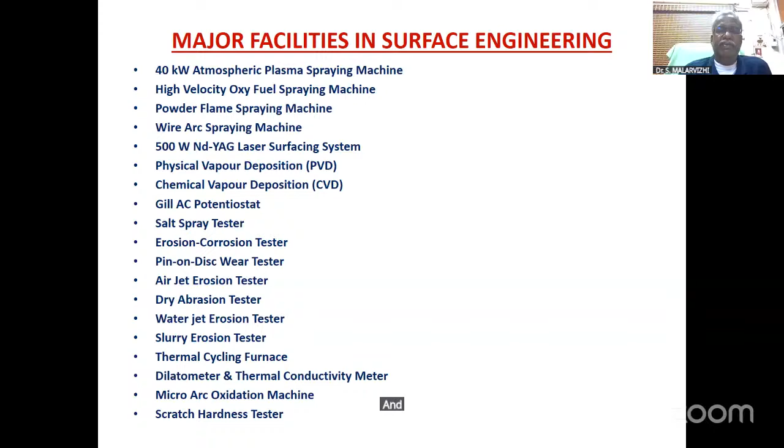Testing and characterization is another facility. We have basic facilities for testing and characterization.

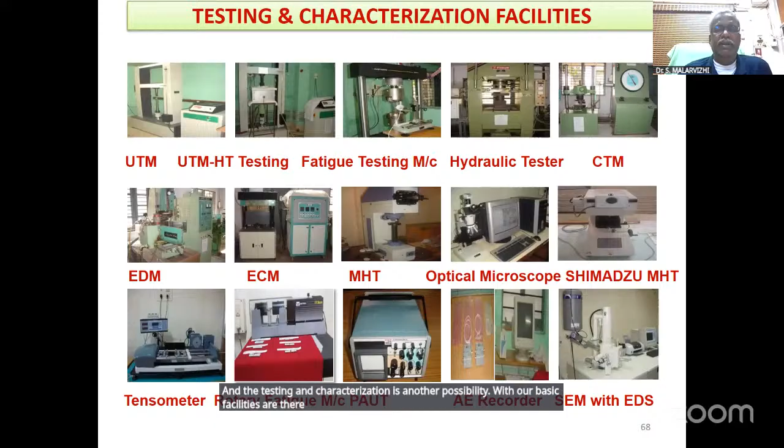Finally, I wish to thank, because this work was mostly done by my students, so it's my duty to acknowledge their contributions. I wish to thank Professor Malarvizhi, who worked on spin arc welding technique; Dr. P. Sivaraj, who worked on friction stir welding; Tushar Sonar, who worked on interpulse TIG welding; Shankar, who worked on rotating arc welding; Prasanna, Nagasai Prasanna, who worked on wire arc manufacturing; Dr. Lakshmi Narayanan, who worked on friction stir welding of IF steel; and Mr. Suresh Babu, a research scholar who worked on solid state diffusion bonding. All these works are funded by different funding agencies - I want to thank ISRO, DRDO, DST, and SERB. Finally, I wish to thank all the participants who are passionate enough to listen to my talk.